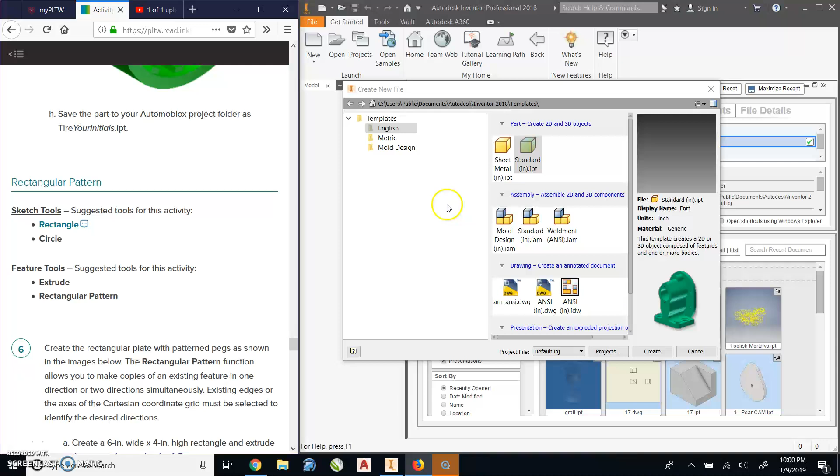This video is for number 6, creating a rectangular pattern. This is a practice one, not a set part or anything.

I'm going to go ahead and create my standard inch IPT. First step, we need to create an extrusion that is 6 inches wide, 4 inches high as a rectangle, and extrude that thing to a depth of 0.5 inches.

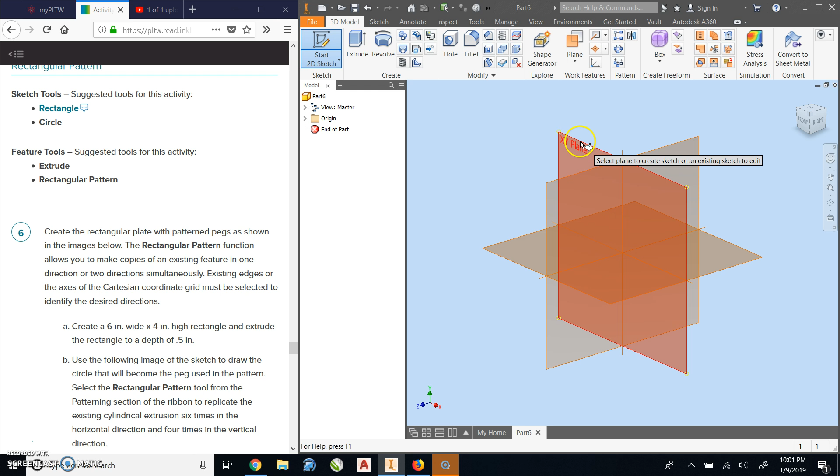So I'm going to start a 2D sketch, put that on the XY plane in this case, and grab my rectangle tool up here in the Create panel. Start at the origin, and my length is going to be 6. I'm going to hit Tab to switch over to the other side and type in 4 and hit Enter.

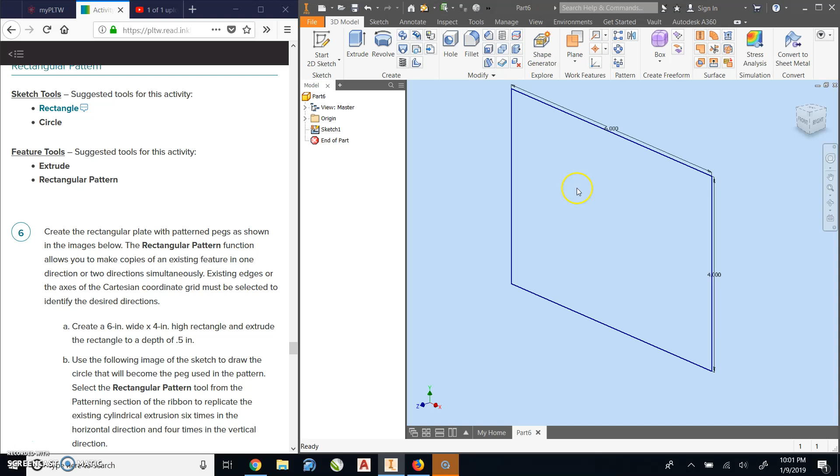So I like to zoom out a little bit and then finish the sketch. Now I'm going to go ahead and extrude this to a depth of half an inch, or 0.5 inch, just like that. So now we have an image down here below on the Project Lead the Way website.

I have a circle with a diameter of 0.3. It is positioned half an inch in and half an inch up. We're going to create that circle, create a very small extrusion. It doesn't really matter what size that extrusion is, and then we're going to use the pattern tool.

So I'm going to start a sketch on the face. Grab my circle, put it down here, and it's going to be 0.3. At that point I can use my dimensions, edge to circle. This is going to be 0.5. Bottom edge to circle, this is going to be 0.5 as well.

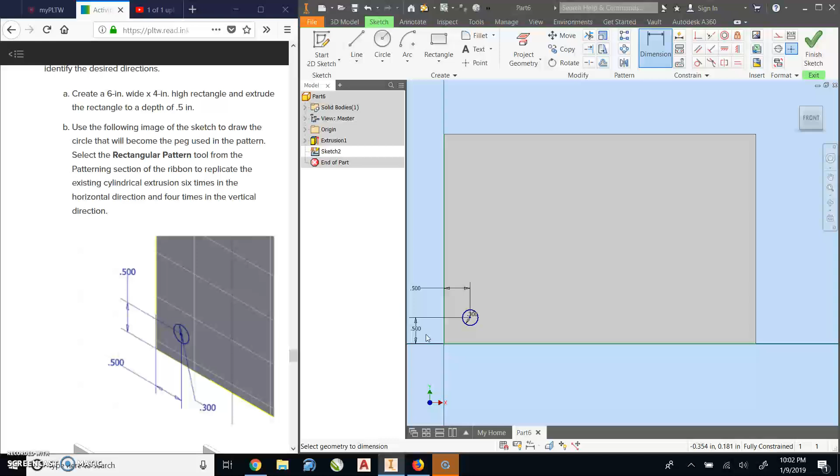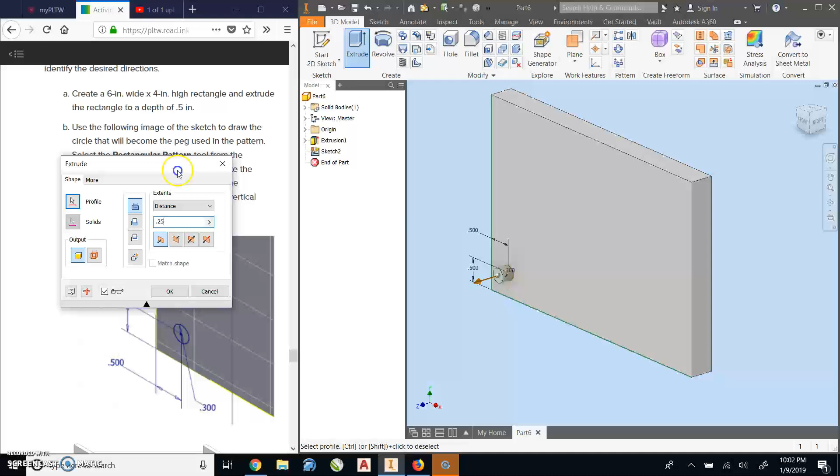At that point I can finish the sketch and extrude it. Instead of 0.5, I'm going to go 0.25. This part does not matter what you extrude it to. Keep it reasonable, but the point isn't to teach you extrusions, it's to teach you the rectangular pattern tool. So I'm going to click OK.

Now I'm going to scroll down here. This is really hard to see. I'm going to go ahead and click it. You're going to see a preview of what's going to happen. We're going to add in 1, 2, 3, 4, 5.

We're going to go 5 across and 4 up, and really it's quite difficult to read what our spacing is here. Actually, 6, excuse me, 1 inch spacing, and we're going to do 4 at 1 inch spacing, and we're going to use spacing for this. So to show how that works, let me zoom out a little bit.

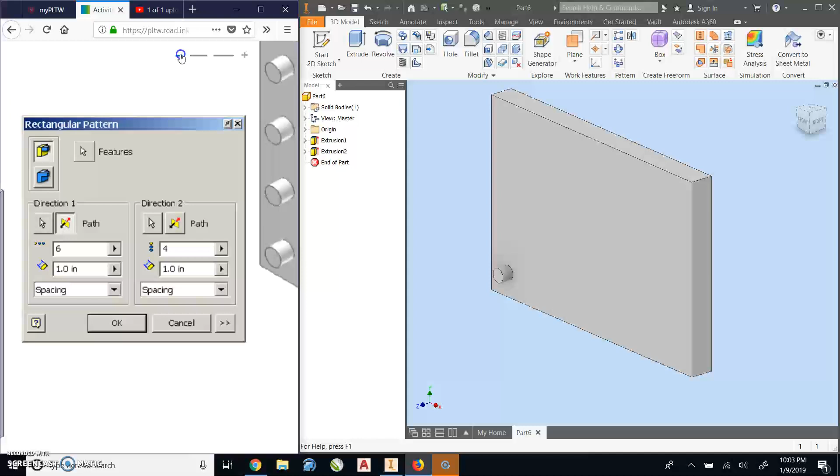Coming over to the pattern area, rectangular pattern is above circular pattern. We've used circular pattern before. We're going to go to rectangular pattern here. First we need to click the feature. The feature I want to click is this. This is what we want to pattern.

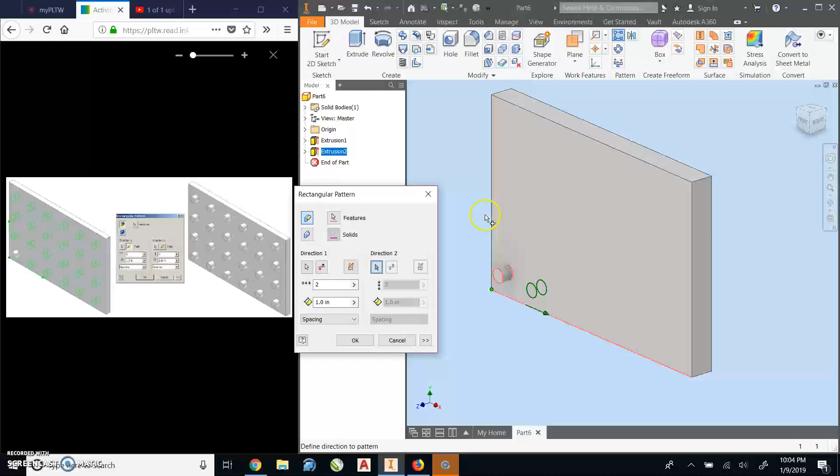I then need to choose direction. In this case, I'm going to click the bottom edge. I'm also going to choose direction 2, which is going to be the sides, so this edge or this edge, it's going to go in that direction. Notice when I click the direction the arrows are pointing. On the bottom, the arrow is pointing the way we want. On the side, the arrow is pointing the incorrect way.

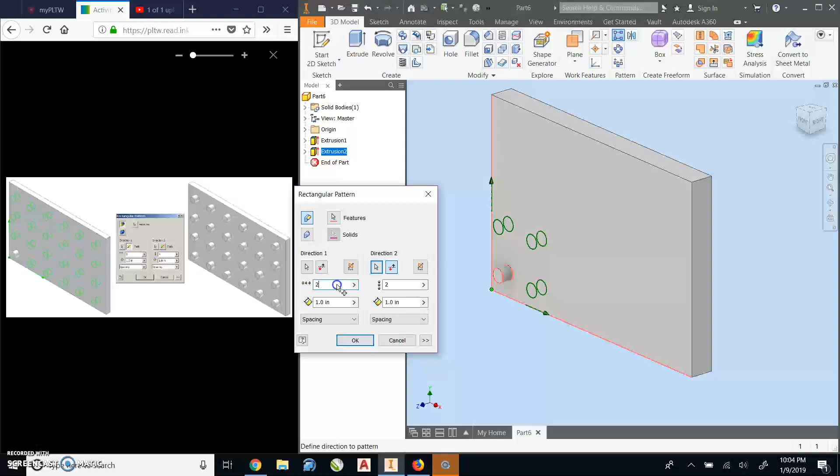We can click the flip to have it go the opposite direction. So in direction 1, in our case, we're going to do 6 of those. In direction 2, we're going to do 4 of those, and then I can click OK.

And now we've created that little feature that many times on our part. This is really powerful if we have something that's repeated in the same spacing over and over again, so that we don't have to draw each one individually.